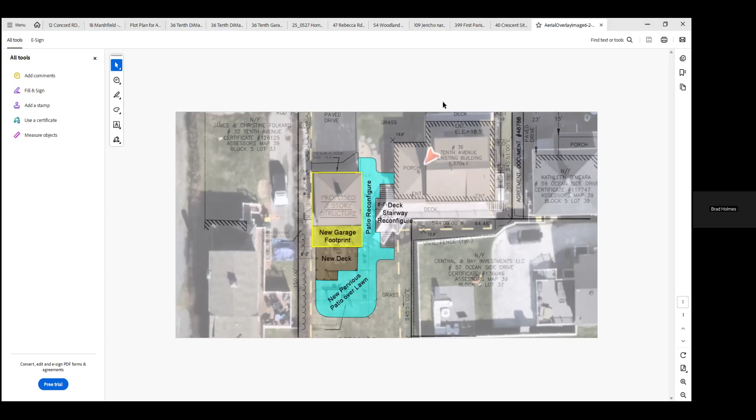Just a couple of quick things - the paved drive is already there and it's going to be retained, correct? Correct. I think what Brendan was asking was the measurement difference on the new garage footprint, the square footage being added. Can I see how it's outlined? Is it on the other sheets you've sent in? We have sent in garage details - it's on the foundation plan and architectural drawings. The garage itself is approximately 22 feet wide and proposed at 32 feet long. So without giving you an exact number, I'd say it's probably 10 by 22 greater than what's there now.

What is going to be underneath the deck that's off the second story? Patio. The patio will extend to the back. So will that all be pervious pavers or open ground? Pervious pavers.

I'm just wondering if there's any way to stick in any mitigation there. And on that concrete pad that I'm glad Penny noticed - I don't know what it's being used for, but if it's not being used, can we get it out of there? We can remove that as part of mitigation. We could take that out and loam and seed it. Okay, that would be nice, unless there's a good use someone has for it.

The kids are playing hopscotch on it. I understand. Or it could have been for a grill, I don't know. I'd love to see it go where you're enlarging a bit. I don't see any big deals here, just little stuff that helps the overall outlook. Otherwise I'm done, Jen. We'd be happy to remove that. Good.

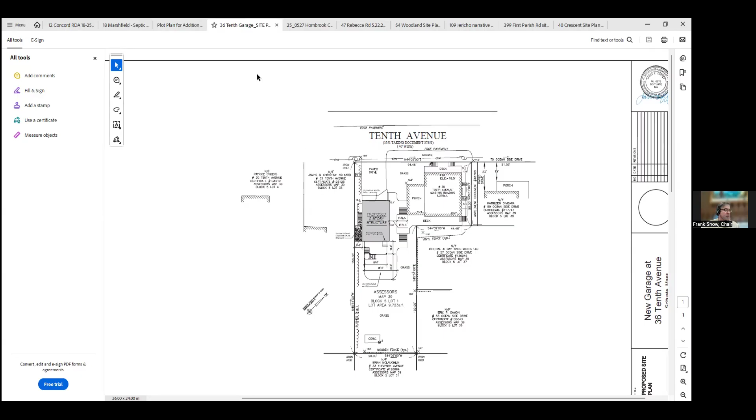All right, here, septic. Where's Frank? Wait a minute, septic? I'm getting there. You coming back, Mr. Frank? I was trying to finish a bite of my apple. Thank you. Have a bite of your apple, it's good for you. Thank you, Jen.

18 Marshfield Ave. On June 2nd, 2025 at 6 p.m., the Scituate Conservation Commission will hold a wetlands hearing under Chapter 131, Section 40 of the Massachusetts General Laws and Section 30700 Town of Scituate Code of Bylaws for the notice of intent filed by 18 Marshfield Irrevocable Trust for repair of a septic system located at 18 Marshfield, Scituate. Abutters and other interested parties are invited to attend. Information to access the meeting will be available on the agenda posted on the website.

And we have someone from, it looks like maybe James Garfield - somebody from Hassett is here. Jeff, Morse. Hassett here with Morse. Wow, they got out the big guns tonight. We haven't seen you in a while. No, it's been a month or so, a couple months anyways.

So this is an NOI for a septic repair at 18 Marshfield Ave in Humarock. The property is about 5,000 square feet with a 4-bedroom home, and the septic system, as far as we know, is original to the home. Being in Humarock, it's a barrier beach and also land subject to coastal storm flowage, an AE-13 FEMA zone. We're proposing to abandon the existing septic system and install a new Title V compliant system consisting of a 1,500-gallon septic tank, a distribution box, and a leaching field, 20 by 30, a traditional crushed stone leaching field.

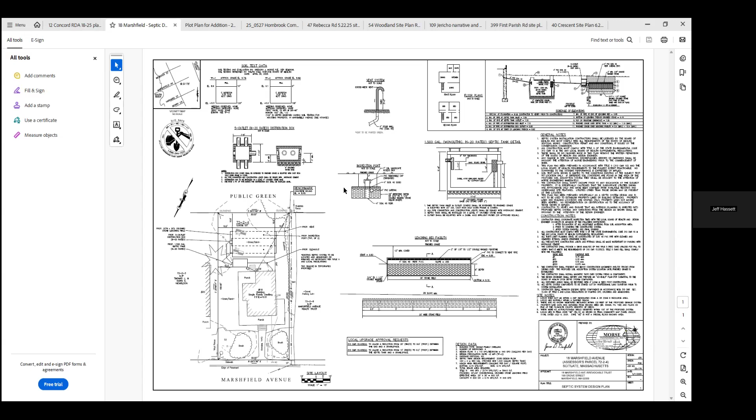Okay, can we close and issue, Jen? Yes. Jeff, did you hear anything back from Board of Health? Are you comfortable? I didn't reach out to them, but I can't imagine they would have any issues with it. Well, it's at their risk, right, Frank? They have to come back to us. I mean, it seems so straightforward. Yeah, it does.

I make a motion to close and issue on 18 Marshfield Ave. I'll second that. Second by Richard. All in favor? Jen, yep. Brendan, yes. And Eric, yes. Thank you, thanks Jeff, thank you.

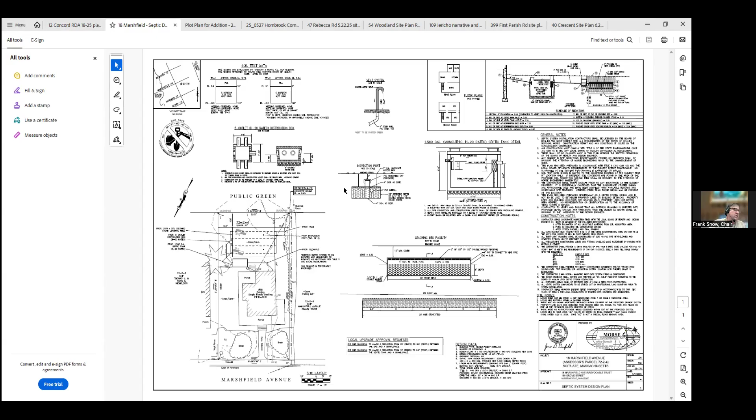54 Woodland. All right, that's myself again. This is an amendment. On June 2nd, 6 p.m., the Scituate Conservation Commission will hold a wetlands hearing under Chapter 131, Section 40 of Massachusetts General Laws and Section 30700 Town of Scituate Code of Bylaws to amend the order of conditions and stormwater permit issued under DEP File 68-3140, as requested by Mike Goslin, to change the proposed footprint of a single-family dwelling to be located at 54 Woodland Road, Scituate. Abutters and other interested parties are invited to attend. Information to access the meeting is available on the agenda.

So as you noted, this is a request for an amended order of conditions. It's a single-family home project that was recently approved, and the only change is that the property was recently sold to Mike Goslin, and we updated the site plan for his new house footprint that he's looking to build.

Oh, we lost you, Jeff. Where'd you go, Jeff? I'm looking to see, but... he's over there, and his mic supposedly is on. Oh, it's mute. A meteorite hit his house. Hey Jeff, oh Jeff, we lost a whole big section, you have to almost start over. Can you hear me? He's having issues. We'll see if I can send him an email. Poor Jeff's talking to himself.

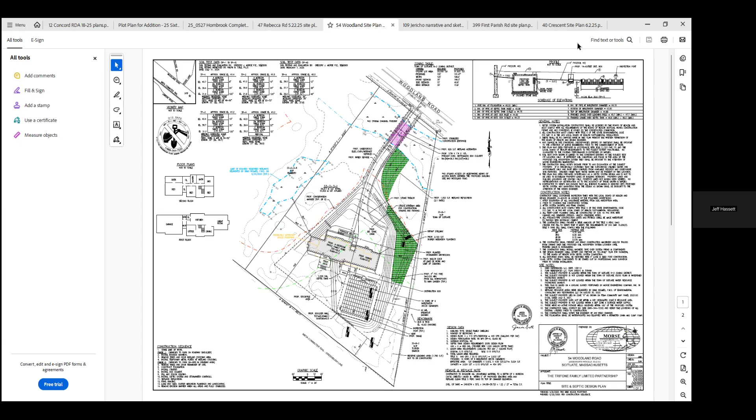Hi, so the change is not in the 50. Is it in the 100? I really can't tell. Yeah, it is. You see the green dash line that bisects the house? Yes, that's the 100-foot buffer. So the house is about half in the 100-foot buffer. So then I'm going to go back to Eric's question—why isn't there more mitigation now? It's not just the 50 that counts, it's really the 100. Everything counts. Right.

When we permitted this project, we had a 626 square foot wetland alteration, and we're providing a wetland replication buffer at a 2-to-1 ratio, which is that area closer to the road. And that area adjacent to the house, we're just calling a buffer mitigation planting area. We came up with 2,100 square feet somewhat arbitrarily, based on the rain garden and the associated berm, and it's adjacent to the wetland, so it's a good spot for a buffer planting area anyway. It wasn't a ratio or a calculation, that's just how we came up with that.

Okay, so the original, what was the square footage footprint of the original house and the new one? What's the difference here? So I don't have the existing and the proposed footprints, but what I do have is the change. The new roof footprint is 785 square feet larger. And the driveway is smaller, so it ends up being a net increase of 450 square feet of impervious.

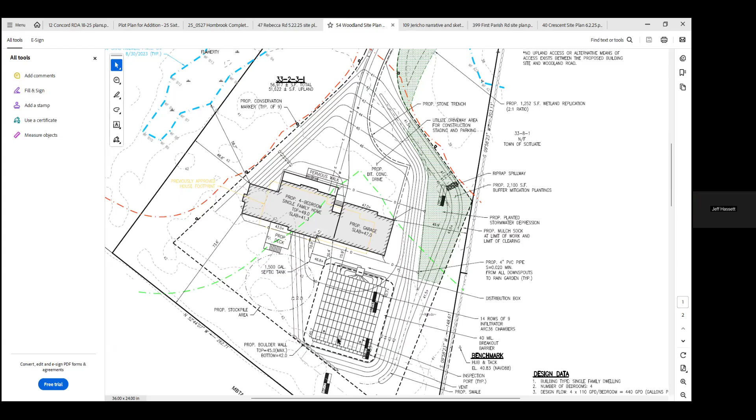So do we feel like we can take that information from Eric and Jeff, Jen Smith, and incorporate that into an order on that amendment? Yes, I think we can. I think we can get that figured out.

So I think if everybody's good now, copacetic, I'll take a motion. I guess I'm making a motion to approve the amendment with the stipulations that Jen's going to write up. I think that's probably the appropriate motion. That's Penny, or a second.

I'll second, from Eric. All in favor? Richard, yep. Jen, yep. Brendan, yes. Great, thank you. Thanks, Jeff. Alright, thanks everyone.

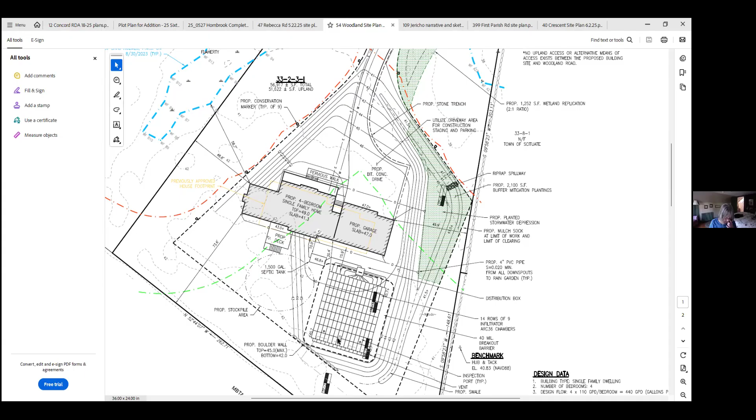47 Rebecca Road. Oh, boy. Well, okay, are we opening this one? Yes, we need to open this.

On June 2nd, 6 p.m., the Scituate Conservation Commission will hold a wetlands hearing under Chapter 131, Section 40 of the Massachusetts General Laws and Section 30700 Town of Scituate Code of Bylaws for a notice of intent filed by Mark Hornbrook for the demolition and reconstruction of a single-family dwelling located at 47 Rebecca Road, Scituate. Abutters and other interested parties are invited to attend. Information and access to the meetings is available on the agenda posted on the website.

So we have Atlantic Coast Engineering. Yes, hold on, I need to unmute Jed. Jed Hannon is with us. Good evening, Jed Hannon with Atlantic Coast Engineering. Can everybody hear me okay? Yep, we got you. Okay, great.

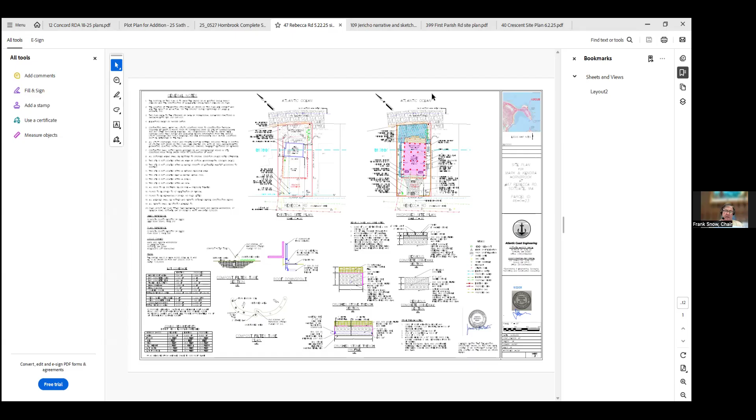So this is 47 Rebecca Road, a fairly old and dilapidated home that is inside the FEMA flood zone. The finished floor elevation is below the FEMA flood zone. It's land subject to coastal storm flowage, coastal dune. It's in the VE 16 and the AE 15. Most of the house is in the AE 15, but because the line goes through the house, the more stringent code is required, so it's the VE 16.

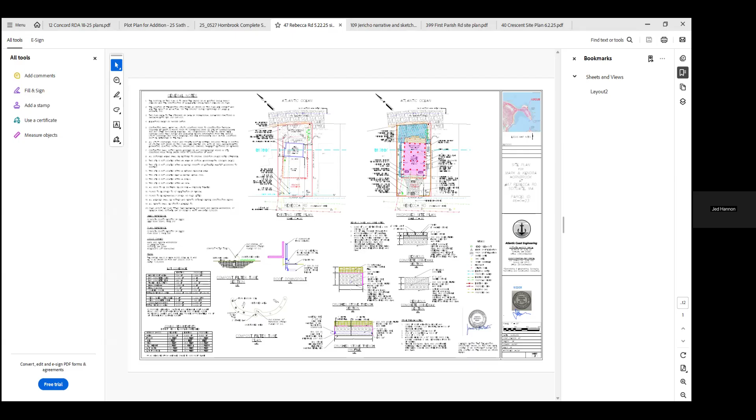What's proposed here, Rivermore Engineering did the structurals on this, and we're proposing concrete piers on helical piles. There will be open concrete piers for obvious free flow. What the architect has designed is FEMA compliant breakaway panels. We've also proposed pervious concrete driveway and pervious pavers for that same driveway area, and then in the rear we're proposing a pervious paver patio.

At the bottom left corner of the site plan, we have a square footage tabulation for pervious, impervious of what's there existing and what's proposed. What we have proposed is a betterment, a significant improvement in terms of providing a more pervious and porous site in order to recharge stormwater and when wave action makes its way over the seawall. So we're doing our best on a challenging site to handle both stormwater and wave action.

For the leaders and downspouts, as shown on the plan, we're proposing to capture that and discharge below grade into a stone trench. That detail is shown on the plans as well. All of the utilities are proposed to be lifted up out of the flood zone. I'd be happy to share the architectural drawings if anyone wants to see them. Other than that, I'd be happy to answer any questions you might have. Thank you.

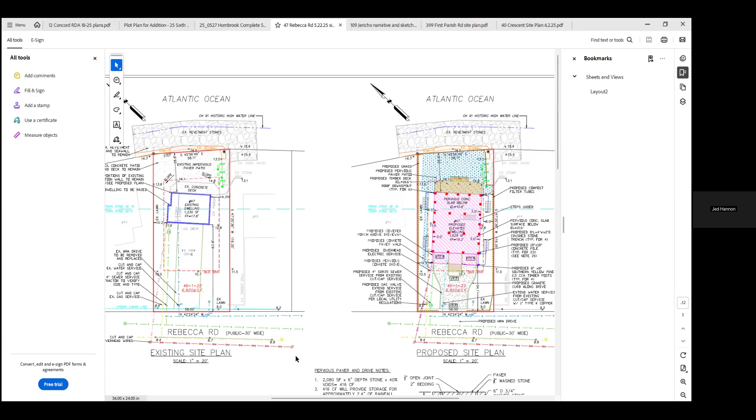Jen Smith: Sure, we did receive the architectural plans. Those should have been emailed out, so hopefully you have those. It's good that they're elevating it, getting the foundation out of the ground in this area. However, it is an opportunity to bring the site into being a more functional dune area. So yes, pervious surfaces are good, but we really want to see more. We don't necessarily want to see hard surfaces in these areas that get hit so hard with storms. So I do have some concerns about the proposed surfaces under the house and for the driveway.

There weren't any comments from DEP, but like I said, I do agree with it. It's dune, it's land subject to coastal storm flowage, it's part of the site's in a velocity zone, and those are some of my comments to start with. Okay, thank you.

Let's see, Jen Foley, what are you thinking? There's a lot happening here.

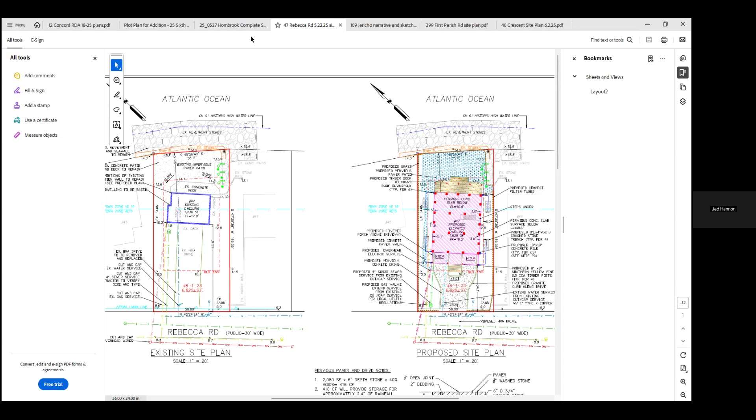I'm not sure who that was that agreed with me, but these are, Richard. It was Richard, thank you Richard. So is the driveway, did you say what the driveway is? Yes, the driveway, if you can scroll down on the plan, there's actually a detail just below the proposed layout.

Proposed site, below, yeah, it says pervious concrete driveway. So it's a 6 inch pervious concrete material, and then there's pavers with 3/8 wash stone in between to give it some rigidity, but also make it as porous as we can.

I'm sorry, I don't understand. Pervious concrete, but then also pavers? What does that mean? Yeah, so that's the detail right below where the text says proposed site plan. So it's both pervious concrete and then pervious pavers on top, so that it has a base material that's solid and in theory there won't be any settlement.

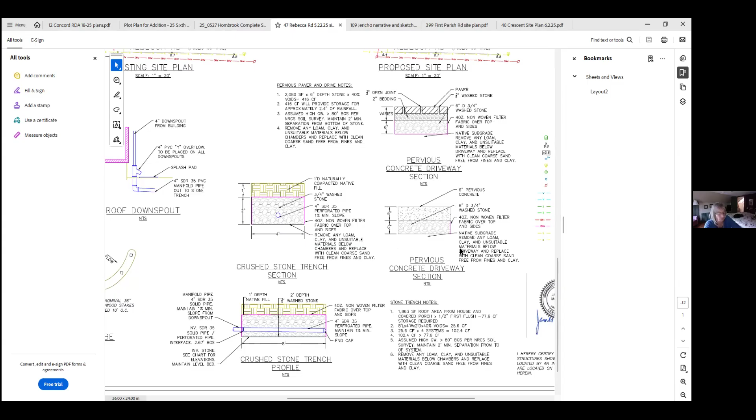The concrete, I think, is broken up, Jen. Yes, okay, I guess I'm just used to concrete or asphalt being impervious, so I think that's what's throwing me. I mean, it is unique, pervious concrete, but it will have saw cut joints, expansion joints, and it is pervious.

Okay, I guess I do. I'll move you, Frank, you can move on for now while I... there's a lot going on in this spot, so we'll circle around.

Major Penny, yeah, this is major compared to what's there. It's a lovely little cottage set way back with a lot of grass in front, and now it's all gonna be gone.

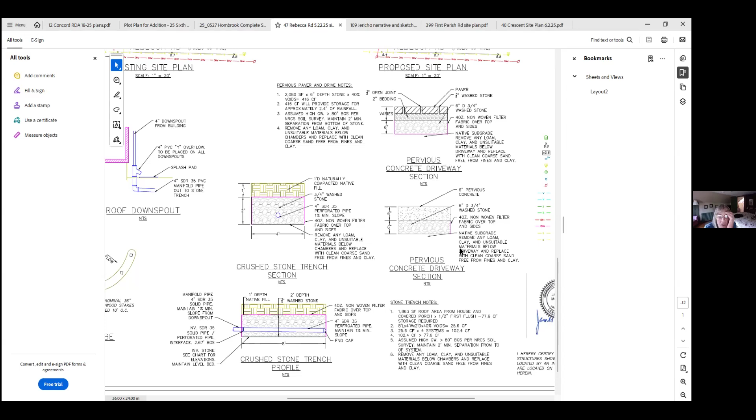Oh, could we go back to the plan? I can't read this, so I'm having a hard time, and I don't have my hard copy. But oh, okay, thank you.

That's better. What I'm trying to see, proposed timber deck. Is there gonna be spacing on that timber deck for the water to come flow up through? Yes. And go through? Okay, yes.

Patio, that's a very big patio you're putting out front there. I'm not crazy about that right there because the ocean's right there, baby. It's right there, there's no beach out there.

Oh, okay, I don't quite understand why, if the house is going on piles, why we have to have a concrete slab underneath the house. That's confusing to me.

Sure, so this is what we discussed with the owner and the architect. We are proposing pervious concrete underneath the house. If the commission's desire is more to use stone or some other porous material, I'm sure we could speak to the owners. In fact, the owner should be on, he's raising his hand, Mark's iPad.

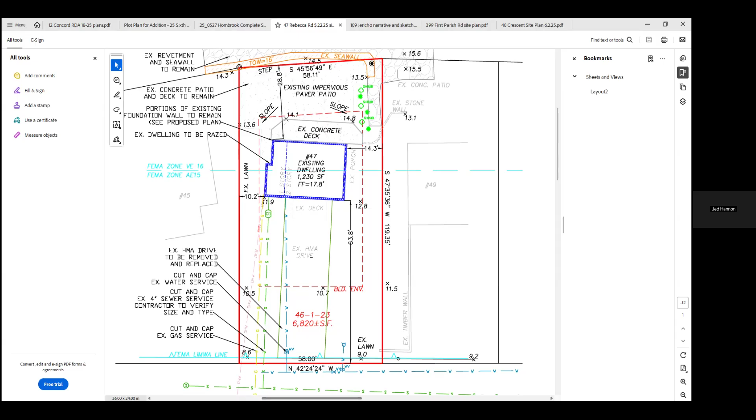The patio in the rear, if you look at the left-hand side of the drawing, that's an existing impervious paver patio, and it covers almost the entire backyard area, right up to the seawall. What we're proposing is a slight decrease in that square footage of the patio, but this is proposed as pervious. Then on the left-hand side, all along, it's proposed grass and lawn area. So in terms of square footage, it's a net decrease.

There's an existing concrete deck, and that's being taken away completely. And the new deck has no cover. Okay, thank you. I'm not wild about the concrete underneath.

I know we're talking about pervious, and also for the driveway, there's pervious concrete. What's the flow rate of this? Is there a particular product you're using? And what are we talking about for the water flow rate through it?

The permeability, Jed - between, say, gravel and impervious concrete. Sure, yeah, I don't have a perc rate or flow rate right offhand, but that's something I could certainly look into. I think that's pretty critical.

That is critical, yeah. Is this what's being proposed - is it a particular product, or is this something where we're kind of using concrete with other stuff and making our own, I guess? I really don't know how. I know that there's places that make pervious concrete, there's testing of it - I've seen things about that a little while ago. But is that what you're using, or are you using some other blend?

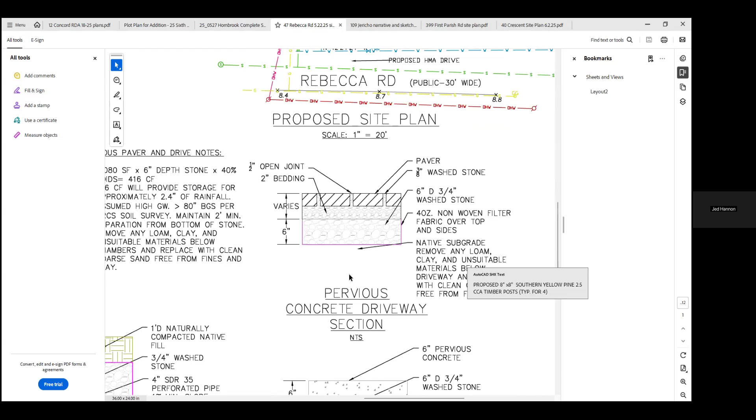So it's a pervious concrete. I could certainly get a cut sheet and see what the flow rate is on it.

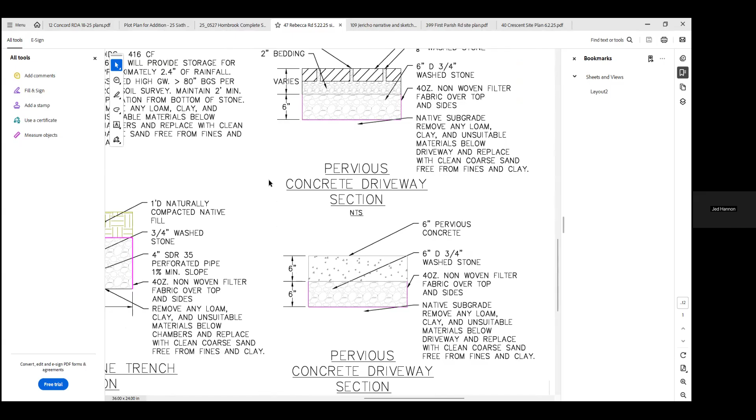In terms of the pervious pavers, they're 6 inches in length and 3 inches in width, and then they have 3/8 wash stone in between. So is the pervious part just the in between? Yeah, it's in between, and then there's square cells in the pervious pavers that are pervious also.

And then the last thing I noticed here is you have along the driveway a granite curb - how high is that? The granite curb is typically 6 inches. That's not pervious, I guess. The granite curb is not pervious, correct? Yeah, I'm not - it's like a little baby wall.

I'm not so much of a fan of that, but that's all the questions I had. Thank you. Thanks, Brendan. Um, where have I been? Eric?

Good evening, Jed. Good evening. While I appreciate the consideration for permeability with the paving on the entire property, my concern, given that we're in a velocity zone, is especially pertaining to water flow and dispersing energy that's coming across during a storm event. And a hard surface, even though it's pervious, is still going to be potentially accelerating the flow of that stormwater.

That ties into the second concern I have. While I'm not arguing the FEMA compliance with the breakaway panels, it does concern me that we're having two issues here - potentially not dispersing energy of floodwaters coming across the patio, but then it intersecting and interacting with breakaway panels. The commission in the past has really struggled with applications presenting some sort of lattice work underneath a structure such as this. We want to reduce the amount of potential projectiles during a storm-related event. Given that the building is in the velocity zone, that's a concern of mine, and just potential storm damage that could be caused as a result.

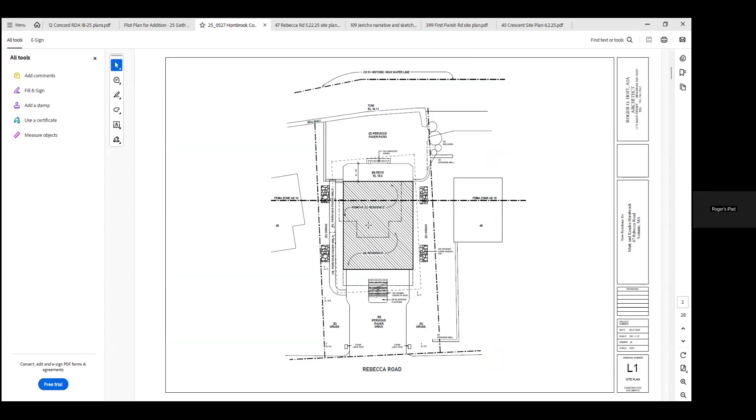There you go. So the idea here is to allow this entire underside of this house, when the event happens, to absorb as it goes. So the patio itself would absorb, and then it gets to the back wall of the house, which is a wall. It's a breakaway, and it absorbs in that this concrete we're talking about using is a

lightweight concrete with sort of a cinder base, so that it allows water to go through the concrete. And then the same is true of the two doors, both sides and the front, which are breakaway walls, so that water can flow right through the underside of this.

There's nothing on that basement area — it's basically attached to the floor surface. Both garage doors have two flood vents each in the doors themselves, but there will be a slowdown, which I think has been talked about tonight, because this entire surface underneath the building is absorbent, as is the driveway, and of course the grass surfaces on both sides, and the patio.

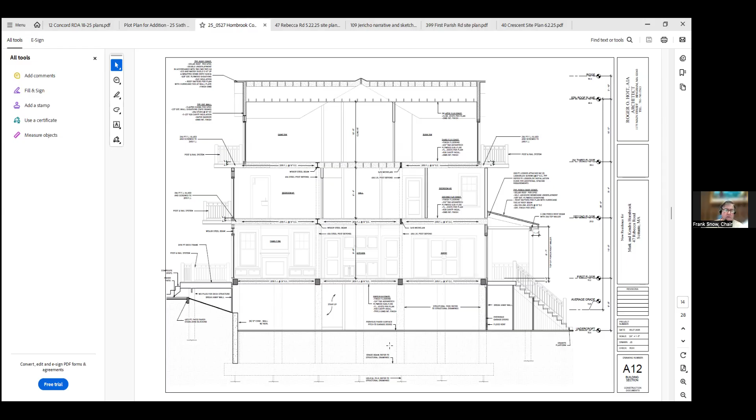Does anybody else have comments? Frank, can I add a couple comments? Sure, well, we have another hand raised, I think I see it - Linda Martin. Okay, Linda Martin, I'm unmuting you. Are you muted again? Linda, you are unmuted.

Well, maybe while she's figuring that out, Frank, can I add a couple comments? Go ahead, please. They do know that they need to file with zoning, so that's just another piece to keep in mind. We typically condition no lattice underneath - we don't want an enclosed area underneath, partly because it can become storm damage and get broken away, and things shouldn't be stored under the house other than maybe parking a car.

And when a storm comes, get out. Yeah, I mean, right - the area does get hit with storms, so we're trying to have a site that's more compliant so we can be doing better as far as storm damage prevention is concerned. I think they wanted to get some comments from the commission before filing with zoning, to see what kind of adjustments needed to be made.

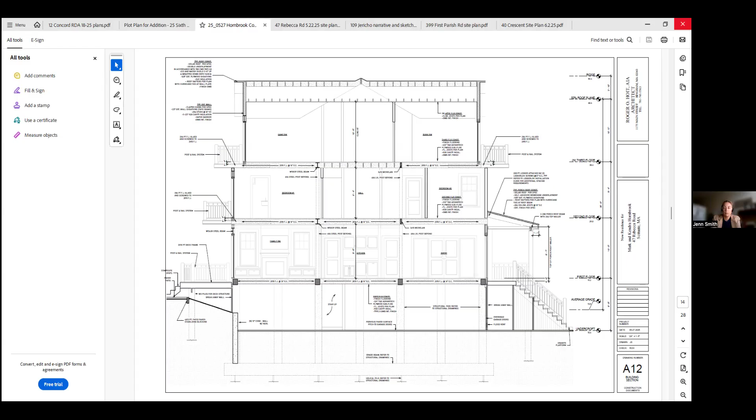So, Jen, I'm just looking at this plan, Jed and Jen. In the filing, under general notes, number 11, the resource area should be labeled as an LSCSF and a dune, correct? So that would need to be corrected, I'm assuming.

And then I think you've heard the concern about the pervious concrete or whatever, and there's been a lot of back and forth on that. It's used in some places where it really needs to be used, but it also requires an awful lot of maintenance - once the set becomes clogged with silt, it isn't very effective.

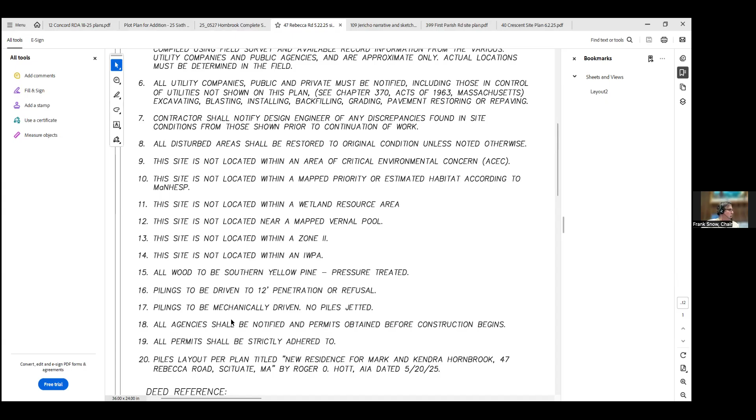Also, overall coverage on this lot - I'm not sure, just trying to look at this lot coverage, Jed. So the house area is a little over double. Yep. There's a concrete patio that's being removed, but it's being replaced with a much larger permeable paver patio, considerably larger.

Yes, and I think part of the question is the permeability of that paver patio versus just natural soil. Maybe it's the same - you're removing an impervious area altogether, you're increasing it, but with a pervious area, so maybe there's not much difference there. I'm not sure we can see that from the calculations we have. It would be good to know the permeability of that patio so we could have some idea of how that works out.

The existing driveway is made of what? Asphalt. So it's an asphalt driveway, and that would be removed and replaced with more pavers.

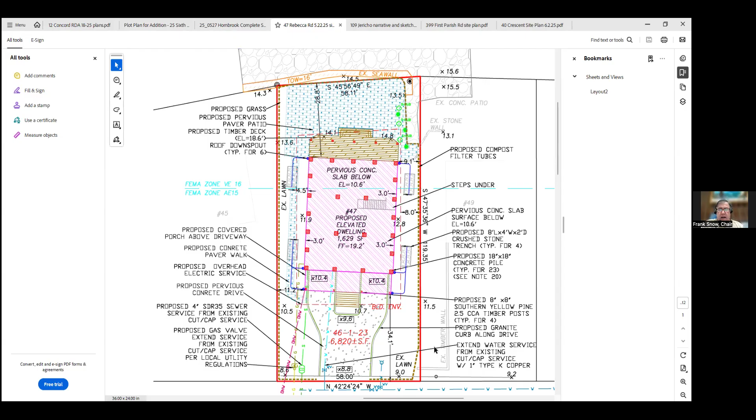Okay, and then either between you or Roger - is the intent here to drive underneath this house and use it for parking, correct? And am I to understand, from that little cross section of the house, that you had planned on having full walls all the way around, not breakaway walls between the piers? Yes, there's actually a pretty good view on the cover sheet of the architecturals, Jen, if you wouldn't mind scrolling to that, it's the first page.

Are those panels open slat or are they all solid? They're detachable, FEMA compliant flood panels. So when a certain force hits them, they become detached. But they're solid, yes. And they can fly if they become detached.

Frank, go ahead. Yes, Jen, procedural question. How do we rectify that - like the existing driveway, I believe, is currently under an enforcement order and the patio is bigger. So when we're making these calculations, this is X% bigger, it's like, well, it's X% unpermitted bigger. Am I making sense? Yeah, I guess I hadn't followed that.

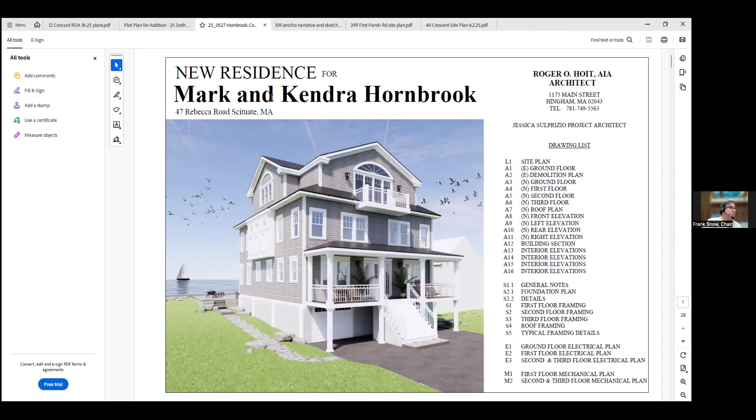On June 2nd, 6 p.m., the Scituate Conservation Commission will hold a wetlands hearing under Chapter 131, Section 40 of the Massachusetts General Laws and Section 30700 Town of Scituate Code of Bylaws. Notice of intent filed by Jennifer Sorwick for construction of an addition, deck, and demolition and reconstruction of a garage located at 25 6th Ave, Scituate. Abutters and other interested parties are invited to attend.

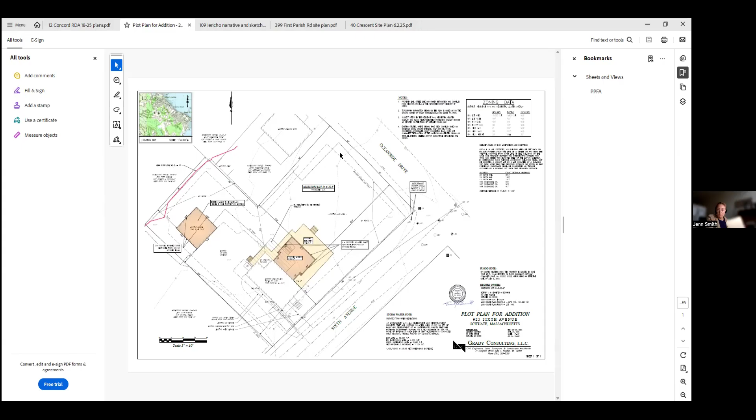There he is. All right, let's try again. Dillon.

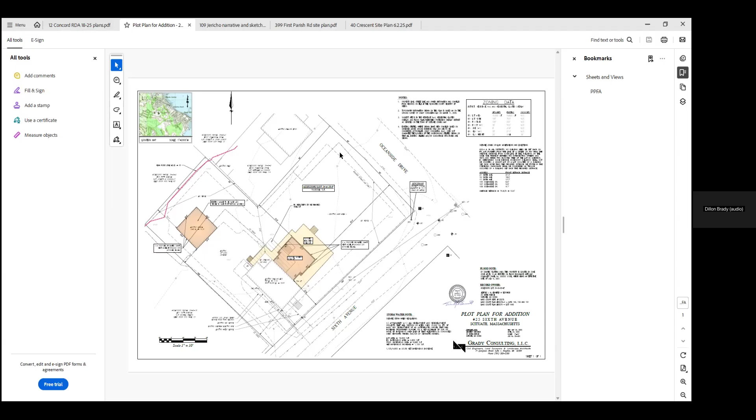The existing garage slab is below the base flood elevation with no FEMA flood compliance, so it will be raised and rebuilt in the same exact area, but we are proposing 3 insulated smart vent models. We believe the overall additions are an improvement, as we're adding a flood compliant addition, and also making a non-flood compliant garage flood compliant. With that, I'll turn it over to the commission for any questions about the project overall.

Okay, thank you. Jenn Smith? Yes, land subject to coastal storm flowage.

I think there was a question about whether the plan shows a limit of work. It would be good to have some details for the footings sent over, now that we know how many there are. I also wanted to make sure there was some space between the decks—you mentioned it would just continue to be grass underneath the deck, and I wanted to confirm that. And I guess at some point we would want the structurals for these footings as well.

Okay, thank you. How about Brendan?

I'm not ready on this one. Okay, sorry. It's all right, you have plenty of others to call on. Eric?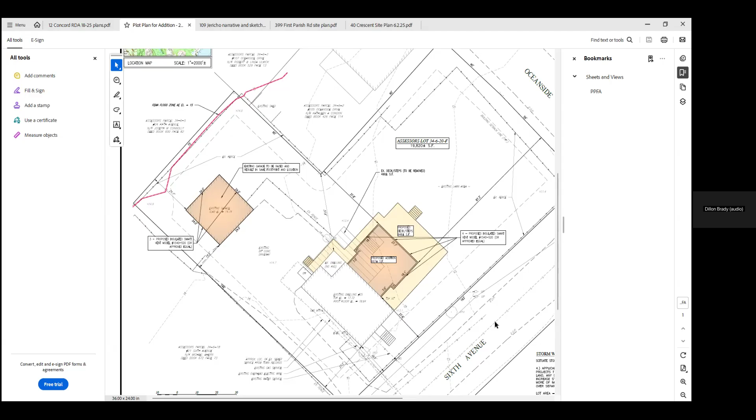And what did you ask for, Jen? Some information on the footings and foundation, right? Yes, usually we at least see some sort of detail. Yes, I can absolutely forward over what the architect has sent me for the photos.

Is the applicant planning to do anything to the driveway, or are they just going to work with what's existing? No, they're completely not touching the driveway, just working with what's existing. Okay, that's it for me.

Do we want to close with adding those couple of conditions, Jen? Yes, we can do that. All right, so I make a motion to close with the conditions mentioned for 25 6th Ave.

That's Penny, do you have a second? Second from Jen. All in favor? Richard? Yep. Brendan? Yes. Eric? Yes. Frank, yes. Great.

Okay, thank you very much everyone. Thank you, have a good night. So now we've got to open and continue a couple of these.

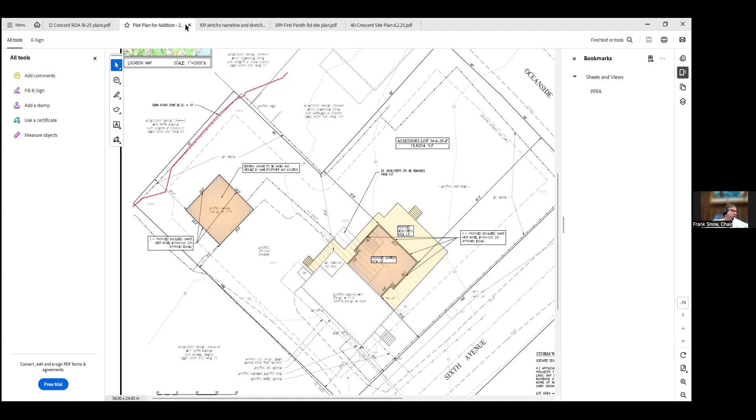On June 2nd at 6 p.m., the Scituate Conservation Commission will hold a wetlands hearing under Chapter 131, Section 40 of the Massachusetts General Laws and Section 30700 of the Town of Scituate Code of Bylaws, to amend the order of conditions and stormwater permit under file 68-3002, requested by Kellyanne Wilson to add landscaping and landscaping features to a single-family dwelling at 113 River Street, Scituate. Abutters and other interested parties are invited to attend. Information to access the meeting is available on the agenda.

And the applicant is asking to continue to June 30th, right? Yes. Okay, so can I get a motion to continue? I make a motion to continue the 113 River Street amendment, to continue it to June 30th. I'll second it.

All in favor? Jen, yep. Brendan, yes. Eric, yes. Frank, yes.

Okay, 50 Eli Ave, okay. Does that need to be opened? No, okay, God almighty, Penny. You're so, oh I'm okay, I know you want to get out of here. Oh I'm just cold. I'm cold, oh sorry, for me.

June 2nd, 2025, 6 p.m., the Scituate Conservation Commission will hold a wetlands hearing under Chapter 131, Section 40 of the Massachusetts General Laws, Section 30700 Town of Scituate Code of Bylaws, for a notice of intent filed by Jeffrey Lennox for the demolition and reconstruction of a single-family dwelling located at 50 Eli Ave, Scituate. Abutters and other interested parties are invited to attend. Information to access the meeting is available on the agenda posted on the website.

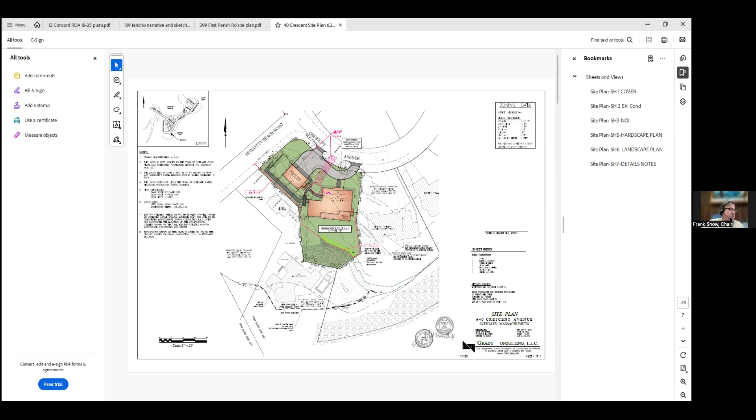On June 2nd, 2025, the Scituate Conservation Commission will hold a wetlands hearing under Chapter 131, Section 40 of the Massachusetts General Laws and Section 30700 of the Town of Scituate Code of Bylaws, for a notice of intent and stormwater permit filed by Jesse Kropelnecki, for the construction of a new detached garage and remodel of a single-family home located at 40 Crescent Ave, Scituate. Abutters and other interested parties are invited to attend. Information to access the meeting is available on the agenda posted on the website.

Okay, great, thank you. So Jeff DeLisi of Ohrenberger, DeLisi, and Harris, and Jesse Kropelnecki, who is the applicant, should also be on, as well as Darren Grady and perhaps Brian Greenberg from Grit and Grace, our contractor.

So to give you a summary, you just read it. It's not a remodel—this is a raze and rebuild of an existing single-family dwelling. Why did we have remodel listed? Not sure—Jen or Josh, that's what I inputted. I think it might have been how we considered the reconstruction of the house. I'm not looking at the notice of intent at the moment, but they'll get into that—they're keeping the same footprint of the house, so that's probably how we got there. Sorry about that. That was my guess, and you just stole the words from my mouth, Jen. We're going to reconstruct the dwelling primarily in its existing footprint.

The entire property is entirely disturbed. The resource areas here are land subject to coastal storm flowage and coastal bank. As the commission is aware, there are technically two coastal banks—one at the seawall revetment, and the other along the contour elevation 21 feet. The property was previously delineated last year in connection with the project to the northeast at 44 Crescent. That project required the removal of the impervious area behind the existing house, which was driveway, and it also eliminated access to the rear of the house by vehicle, such that we are not proposing a garage in the rear of the proposed dwelling. The commission is familiar with the neighborhood, having previously approved the project seaward of the 21-foot elevation coastal bank at 56 Peggotty Beach Road, and also having approved the project at 52 Peggotty Beach Road. So there's been a lot of activity in this area recently.

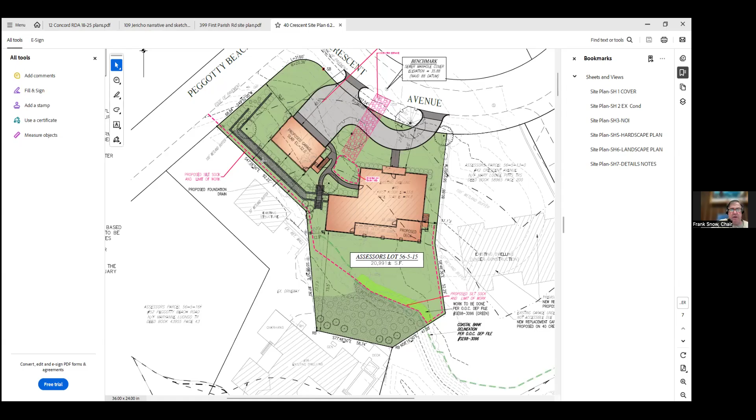Okay, do we have anybody else in the audience? So go ahead, Jen. No, I was saying just you, Frank.

Okay, so comments - when we were out there, there's a strip of land that was supposed to get revegetated as part of the orders for the adjacent site. If you remember, there was a driveway out there that got removed, and they were going to do some plantings, so they have this strip they're obliged to plant on this property, and I guess some of it is the sumac. When I looked into that wooded, brushy area, I noticed some bittersweet and a few other things that probably would be good to control in there, as well as the Japanese knotweed. I just wonder how well that's going to work to have this upper planting area and then a lower one, and if it wouldn't be better to incorporate the two.

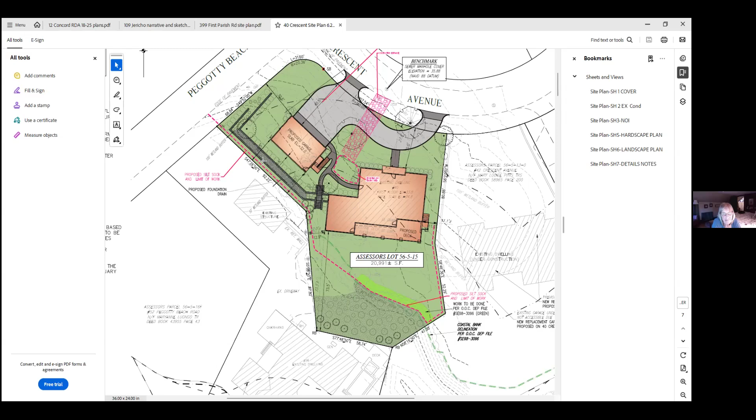Does anybody—I'd like to see it on a plan, Frank, because I know you tried to explain it to me, but I wonder if they could show us that. Can we scroll to page sheet 6? Yeah, I was just going to point that out. It's there if you look. There it is, and then zoom right in there.

Okay, Frank. We really tried. The site visit not only was invaluable for you, as Richard had indicated, it was invaluable for us too, because it gave us the ability to anticipate what issues you might want to see out here, what things you might want us to incorporate into the plans to make it the best plan we can. So this is what we came up with. We're trying to be responsive exactly to your comment, Frank.

Okay, I'm powering through here. What do you think, Eric? Yeah, I mean, I don't have any problem with how it's delineated, I suppose.

I think, to your point Eric, it's good—if the owner's willing to look at that—to evaluate plants that are within there that are already established and existing, rather than knock it all down and start over, the sumac and some others, but weed out the invasives and fortify it with some other plantings. Yeah, I think a blend of existing and removing the troublesome things and adding, with the proposed plant schedule for mitigation, is a great option.

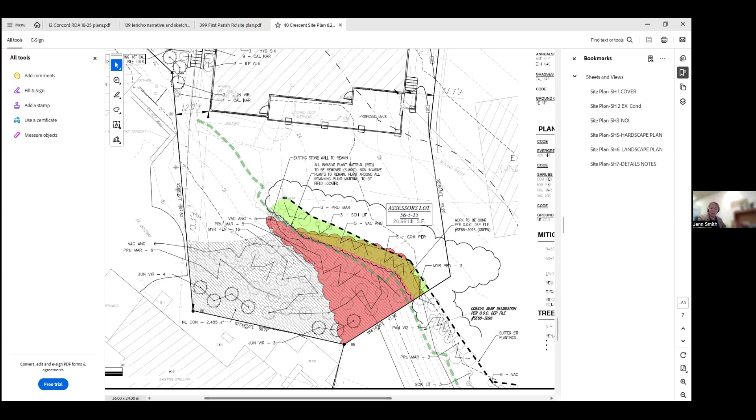They don't want to second it. I'll second, that was Eric. All in favor - Richard? Oh, we lost Richard. Where's Richard? Brent, Richard, how about now? There it is, good. Yes, okay. Jen Foley? She's not here. Brendan, yes. And Frank, yes. Did I get everybody? Yes, yes. Awesome, thank you. Thank you very much. Thanks for the time on that review and the meeting, that was helpful.

So we have 21 Central Ave, which has been requested to continue. We already did continue that. That's right, because that one was open. Did we actually vote that one? Yes, we did. Glad that somebody's on it.

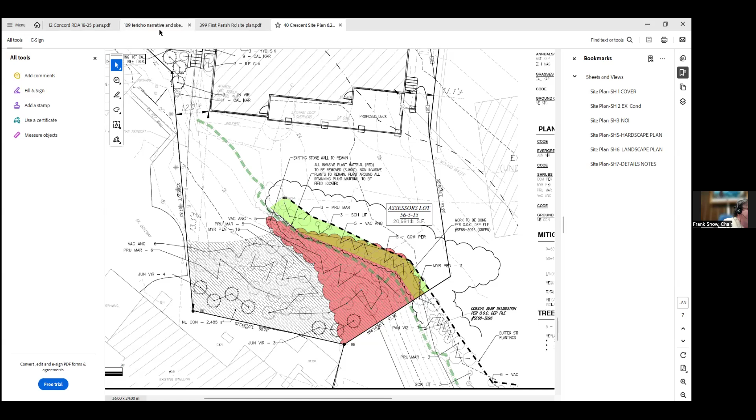So on June 2nd, 2025, 6 p.m., the Scituate Conservation Commission will hold a wetland hearing under Chapter 131, Section 40, Massachusetts General Laws, and Section 30700, Town of Scituate Code of Bylaws, for a request for determination of applicability filed by John Wolf to construct a patio extension and sitting wall located at 109 Jericho Road, Scituate. Abutters and other interested parties are invited to attend. Information to access the meeting is available on the agenda. And the owner and applicant, John Wolf, is here to present his project.

Good evening, Chairman Snow and Jen and board. Thanks for taking the time this evening. I know you guys are probably exhausted, so I'll get right to the point. We are making the application to extend an existing sitting area in the front of our home that is adjacent to the Bay Ridge side. We sit on the corner of Jericho Road and Bay Ridge, across from Museum Beach, and the proposed project entails extending it by 470 square feet of paver material and two sitting walls, if you will.

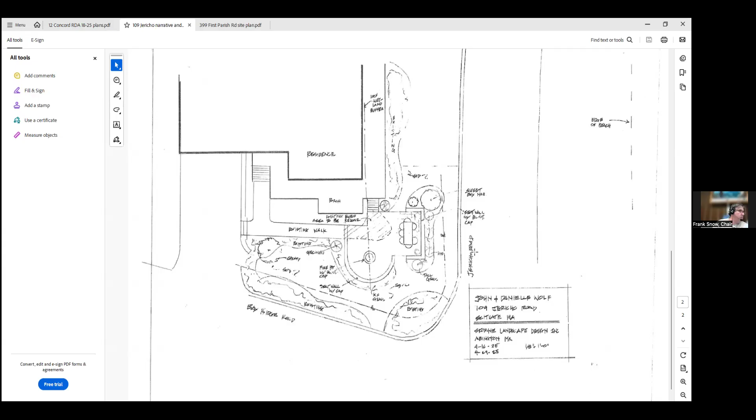Oh, Jenn Smith, you need to tell us. Sure. So it's land subject to coastal storm flow, which is the area we're working in. There is currently a patio there, so they're expanding the fire pit patio, and also adding an area to dine as they've drawn in. They are proposing to have some slats in the wall. From the picture we're looking at, Jericho Road is on the right, so you know things are flowing across the front of the property. There is some additional landscaping proposed in front of these areas on the Jericho Road side, probably more than that, but I just wanted to note that also.

So I am curious about people's thoughts. Jen, thank you for that on the landscaping. Just to add to it, there will be a new planting bed in front on the Jericho Road side, that will have a weeping cherry, a sweet bay magnolia, a small dwarf Alberta spruce, and along the Bay Ridge side there'll be some evergreen shrubs, some flowering shrubs, 5 hydrangeas, 12 little bluestem grasses, and another tall grass. The area that is disrupted in terms of the existing sod will be replaced with sod as well, in and around the new paver area.

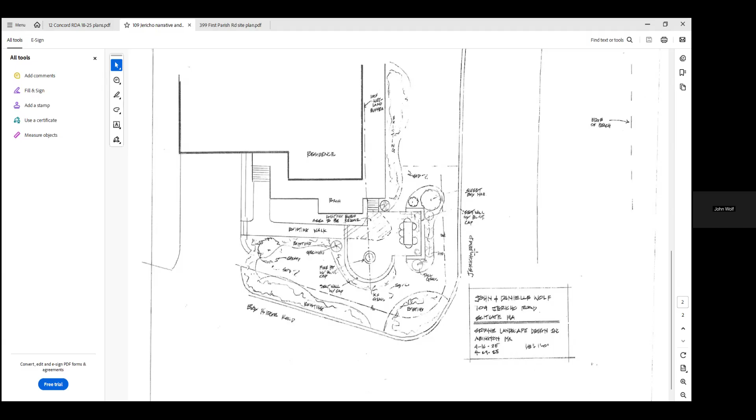So is there one slat in the wall on the section parallel to Jericho Road? Correct. Okay, that's what I thought. I just wanted to double check.

399 First Parish Road, RDA, New England Power Company.

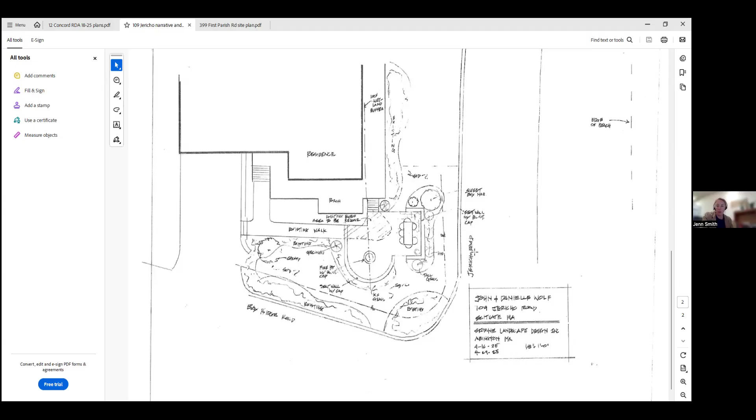On June 2nd, 6 p.m., Scituate Conservation Commission will hold a wetlands hearing under Chapter 131, Section 40 of the Massachusetts General Laws and Section 300-30700, Town of Scituate Code of Bylaws, request for determination of applicability filed by Laura Ernst, National Grid, for installation of new transformers at 399 First Parish Road, Scituate. Abutters and other interested parties are invited to attend. Information and access to the meeting is available on the agenda on the website.

Good evening. Hello, this is Carmen Dancy from Power Engineers. I'm representing New England Power Company for the Scituate substation project. This project is basically the installation of 3 new 115 kilovolt coupling capacitor voltage transformers, or CCVTs.

As well as installation of a conduit trench to connect the CCVT towers to an existing control house on the site. All activities are proposed within New England Power Company's existing Scituate substation, located at 399 First Parish Road. I know that's a lot of jargon, but basically CCVT towers are transformers for high voltage systems that measure and meter the voltage coming in and going out. It's a way for metering and communication for what's coming in, what's coming out, and monitoring the substation itself. The CCVT towers will be installed on top of concrete foundations.

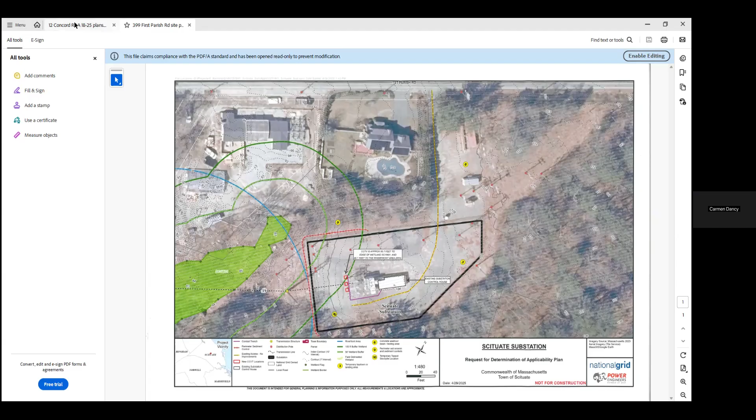On June 2nd, the Scituate Conservation Commission will hold a wetlands hearing under Chapter 131, Section 40 of the Massachusetts General Laws and Section 30700 of the Town of Scituate Code of Bylaws, for a request for determination of applicability filed by Brian Smith for installation of a paver walkway and patio at 12 Concord Street, Scituate. Abutters and other interested parties are invited to attend. Information to access the meeting is posted on the agenda.

Do we have somebody? Yes, Brian Smith is here representing 12 Concord. Good evening. You just want to give us a little outline of what you'd like to do? Yep.

In the front of the house is an existing concrete paver walkway, which we'll be replacing with a permeable paver walkway. Then we'll be adding natural stone steppers from the walkway around the side of the house to the outdoor shower. Then we'll be doing a permeable walkway from the outdoor shower to the backyard, where we'll be installing a permeable patio off of the existing deck.

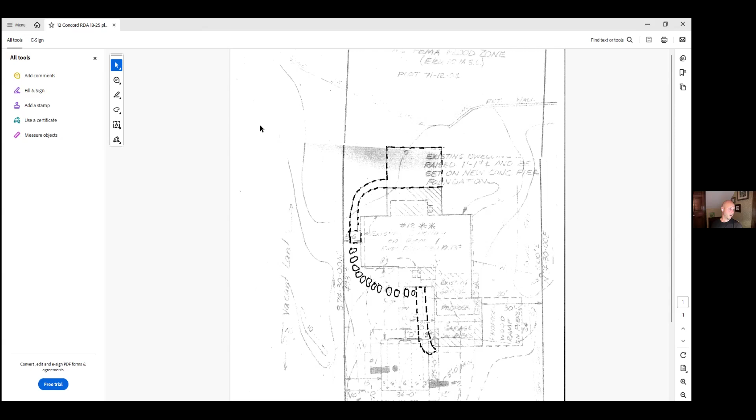I'm good. Okay, anybody in the audience? No hands raised. Okay, Penny? Make a motion for a negative 3. I'll second it. All in favor? Brendan? Yes. Eric? Yes. And Frank, yes. Just an FYI, a negative 3 is good for you, it's good to go. Yes, that's what you want, it always sounds bad but it's not. Thank you, okay, thank you very much.

So we're down to some administrative items. The certificates of compliance, there's actually 4 of them: 282, 284, 286, 288. They were the seawall patio project, so they're just closing out their permits. It looks good, right Jen? Yeah, we definitely went to the site, so I don't have much more to say about that. So that is closed up. That's all I got for administrative for tonight.

Okay, well that's good. Frank, you wanted to say something quick. Brendan's falling asleep. He's not the only one, believe me.

I ran into a couple of folks from the community garden at Appleton Field, and it sounds like the benefits of the fish fry at the Methodist Church this Friday will benefit the community garden. So if anybody wants to get their fried fish and support the community garden, you can do both.

They also asked about the bridge that gets access from the parking area on 3A, Penny. I guess it's in pretty tough shape. They got the funds. That's the only reason I'm bringing it up, is that they just asked. They have the money and they asked about getting somebody to fix it. I told her I thought they should reach out to Warren. I was going to share that. Oh yeah, that's a great idea, have Warren do it. Yeah. I'm just trying to get up to speed on that one. I know they've had the funds, it just kind of kept getting pushed aside. Yep, okay, but Warren would be great. Absolutely, yep, okay, all right.